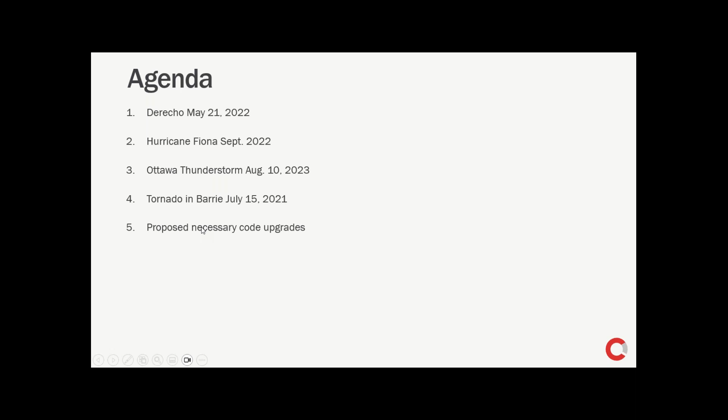So first, the derecho of May 21, 2022. The destruction from a derecho can be similar to that of a tornado, but it's typically in one direction along a fairly straight path. The derecho on May 21, 2022 affected the Quebec City-Windsor corridor. It was described by meteorologists as a historic derecho. It brought winds of about 190 km per hour, and the path extended for about 1,000 km.

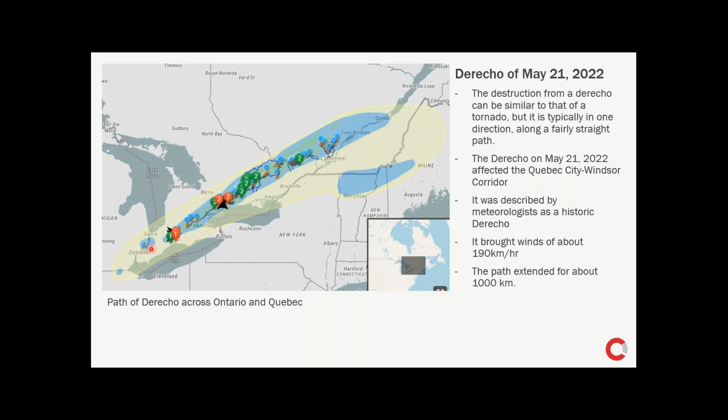So here you can see the map showing the path of the derecho of 2022. It extended from about London all the way to Quebec, and it had a very straight path. And here in this image, I'm showing the path in Ottawa. 3 cities across southern Ontario declared a state of emergency. Power outage affected 1.1 million customers. Hydro Ottawa described the damage to its power distribution system as more severe than the 1998 ice storm. The insured damage amounted to about $1 billion.

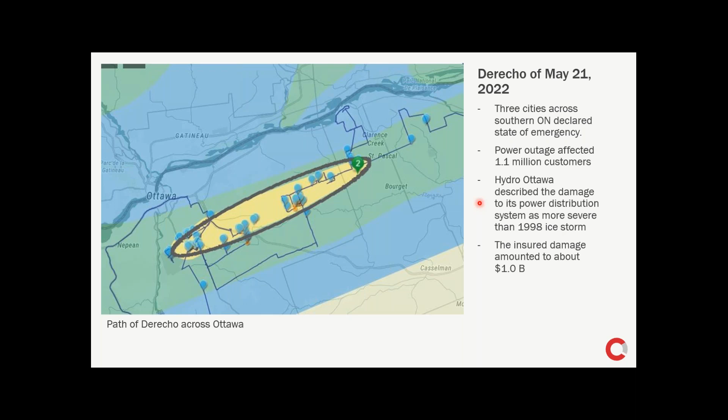So we had many files in Ottawa and also across Ontario. Of course, as you can imagine, a lot of them included tree impact to houses and cottages. So this one, for example, occurred in Parham, Ontario. Cause of loss, of course, tree impact, and it was extensive damage to the roof and porch structure. The safety concern was it had to be shored immediately, but of course, in this case, because it was empty, it could just be left empty with restricted access.

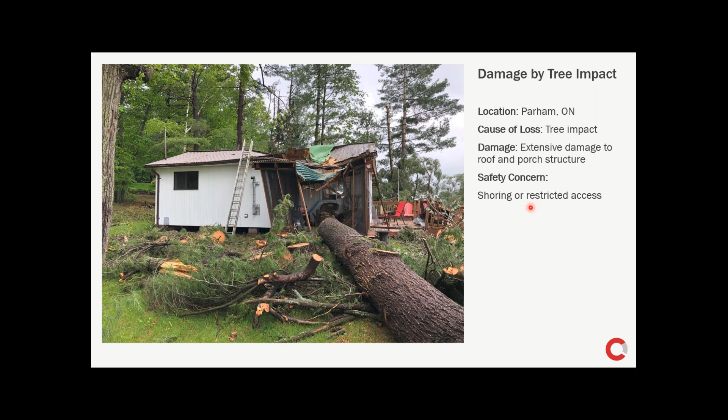Here I'm showing the damage to the roof structures. As you can see, the roof joists and roof sheathing are extensively damaged. Now, here I'm going to show you some rules of thumb about shoring of a structure when it's affected by tree impact.

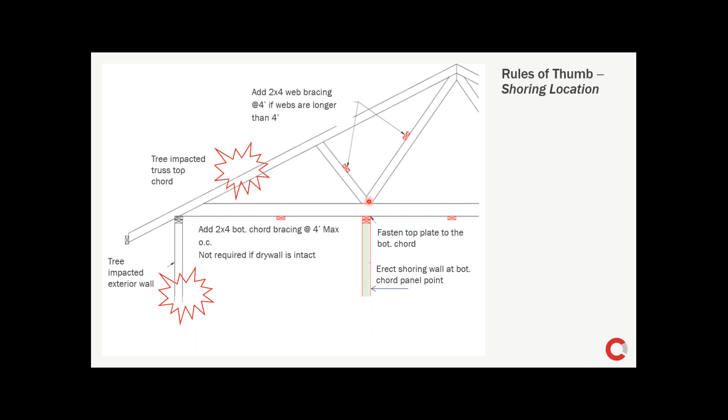So here I'm showing a section of a house or the roof of a house framed with trusses. Let's say the top chord of the truss is damaged by tree impact, and the wall is also damaged. So the contractor should install a shoring wall below the panel point. And the top plate of the shoring wall should be fastened to the bottom chord, and they should install 2x4 web bracing at 4 feet on the web members to stabilize the trusses.

Now, a lot of times, prolonged shoring is required, so the shoring needs to be there for a couple of months. Many roof structures sustain tree impact damage during fall, and in most cases, repair cannot be completed before winter. Usually, insureds want to continue to live in the dwelling, and adequate shoring is a must to ensure safe conditions under snow. Closing any physical holes is also important to prevent further damage.

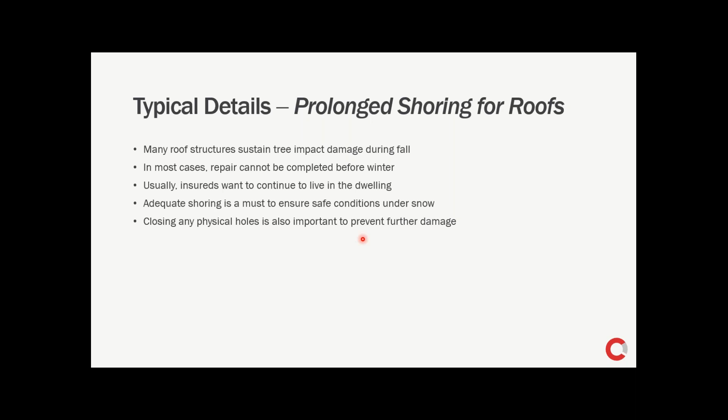Now I'm showing some typical examples of prolonged shoring, if the shoring is to stay there for a couple of months until the repairs can be started. This is showing the section of a roof framed with rafters, and let's say there is some limited damage to a roof rafter. It needs to stay there for many months, and there are also holes in the roof. So they should install a shoring wall under the roof rafter, and the shoring wall needs to extend all the way down to the basement and all the way up to the rafter. And the location of the shoring wall should be just below the small crack that is observed in the roof rafter.

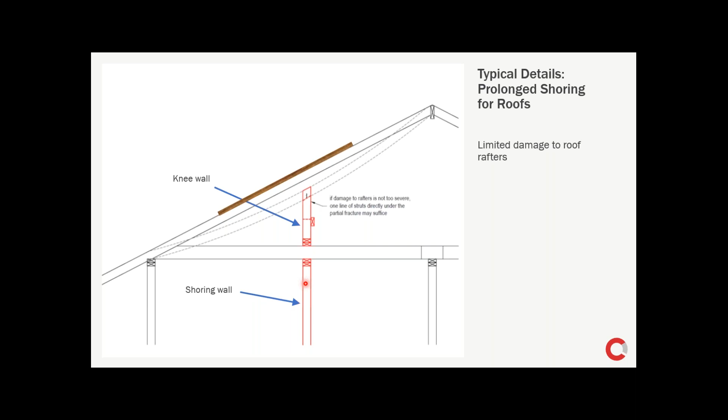And of course, over the roof, they need to install plywood and framing and install proper roofing membrane to stay there during winter. Now you can see that this shoring wall is making inconvenience for the residents here.

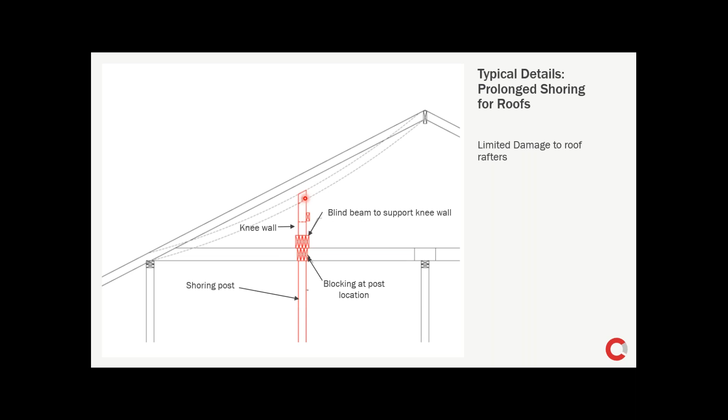So the other way is to install shoring posts and install a blind beam above the ceiling joists. And of course, there should be blocking between the shoring post and the blind beam. And above the blind beam, they can install their knee wall to support the rafter.

Now, if the damage is very extensive, like a rafter is maybe broken in the middle or something, they need to install shoring walls on both sides of the location of that crack. And of course, they need to be extended all the way to the rafter and down to the basement.

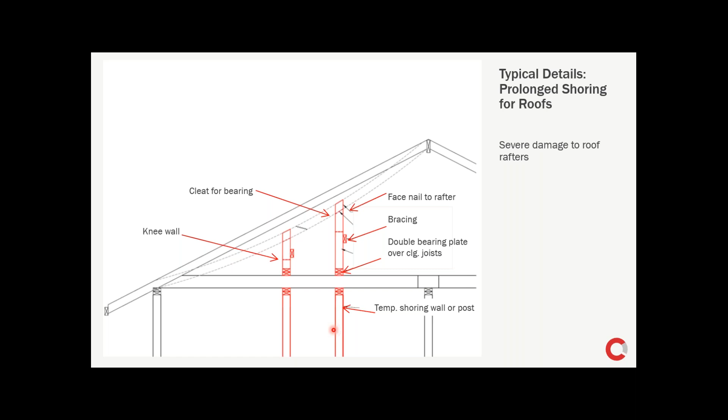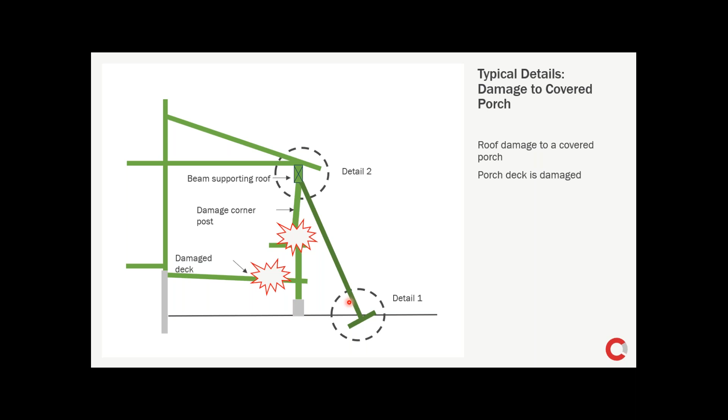Now, when it comes to tree impact, as you saw in this particular example, a lot of times the porch gets damaged. Now, here I'm showing an example of a porch, and I'm showing the section of the porch. Let's say the corner post is damaged and the deck is damaged, and they cannot install vertical shoring under the beam. So what they can do in this situation is install diagonal shoring at minimum 75 degrees.

At the top, they need to install cleats around the beam to properly support the beam, and also to prevent the shoring post from kicking in. At the bottom, they should prepare the ground for a proper firm support for the post, and also they should put bearing pads, and they should be secured to the ground by spikes, and behind the bearing pad they should put stakes into the ground.

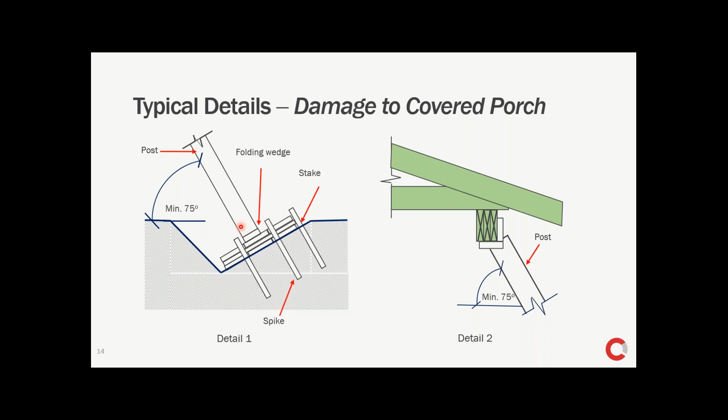At the bottom of the post, they need to install a folding wedge to ensure firm and full contact between the post and the bearing pad. For bearing, they can use outrigger pads or build their own pads using 12-inch by 12-inch or 16-inch by 16-inch pads. Now, this depends on the bearing capacity of the soil. For softer soil, they should use 16-inch by 16-inch. For stiffer soil, they can use 1 foot by 1 foot.

The pads can be constructed of 3 layers of exterior grade, 1/2-inch to 3/4-inch thick plywood sheets. The total thickness should be at least 1.5-inch, and they should be secured with number 8, 1.5-inch long structural screws spaced in a 4-inch by 4-inch pattern with a 2-inch edge distance.

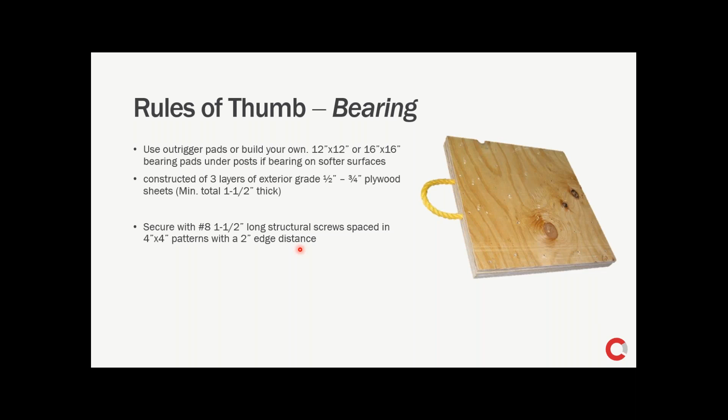Now, it is very common that when we go to site to inspect the damage, we see that the contractor has not installed any shoring to support the beam. So in this situation, I'm just telling you to be aware that when there is tree impact and there is damage to the corner post, because the restoration companies usually are the first people on site, they need to be aware of this and they need to install shoring: either a shoring post, diagonal shoring post, or needle beam. And we're going to talk about needle beam later on in this presentation.

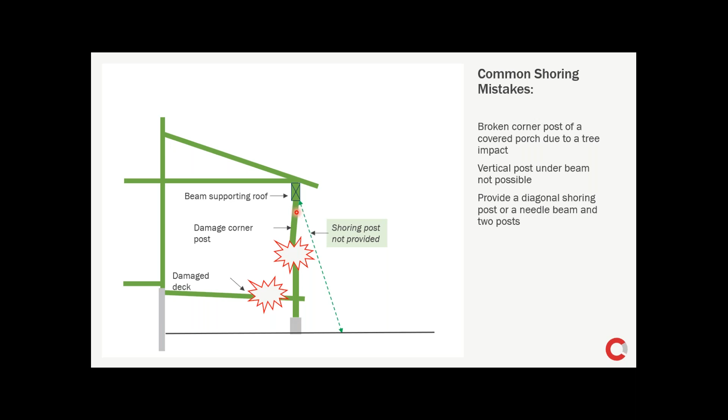Needle beam is they put beams under the beam and they put posts on both sides of the broken post. Again, there are situations where we've been to site and the contractor neglected to install shoring between the ceiling joist and the rafter. So there was a tree impact to the rafter or the truss, and the contractor installed a shoring wall under the ceiling joist, but it was not extended to the rafter. So technically it was no good.

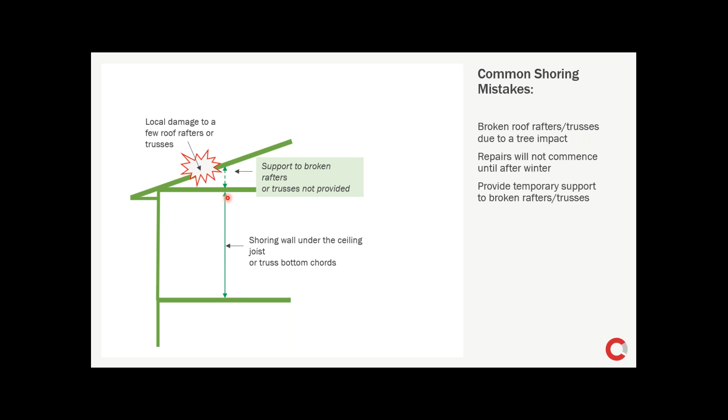When the engineer attends the site, of course, there's some obvious damage that can be seen from afar, but the engineer should always look into the attic or try to look into hidden spaces to see if there is any hidden damage. And if it's covered by some drywall or something, the contractor needs to partially remove the drywall around the obvious damage for the engineer to be able to see if there is any damage to the structural framing.

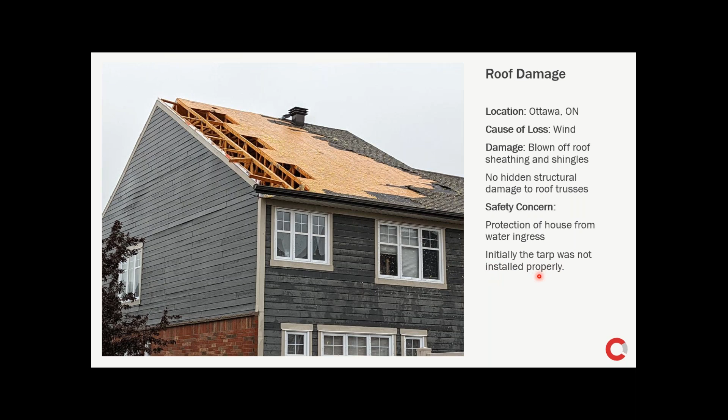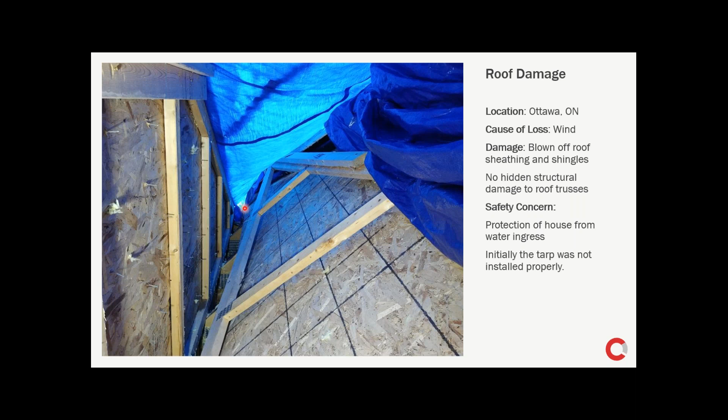Here's another view of the house. So this was a tarp that was installed initially by the contractor. Now, looking into the house, under the tarp, you can see that there are some holes here, and for days, water penetrated the house and caused further damage to the interior finishes. So this is to show how proper restoration effort from the get-go can prevent further damage down the road and reduce the insurance cost.

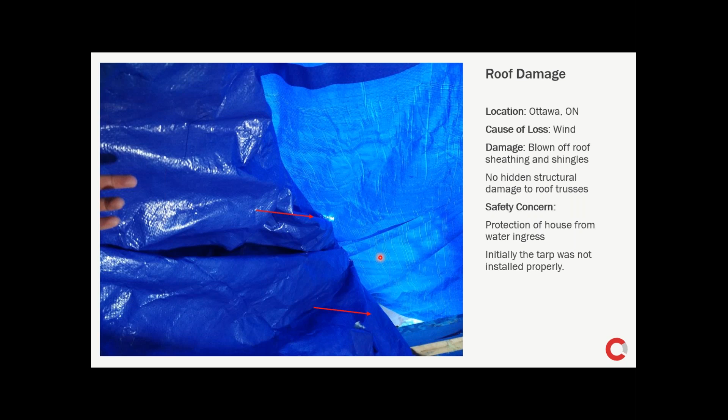Now, common shoring mistake. So let's say there's a few cracked or broken rafters and there's a hole in the roof, and repairs are not likely to happen before winter. Placing a sheathing board over the hole, or putting a tarp, is an insufficient closure. It is very common, especially during large-scale natural disasters, that not all houses can be repaired promptly, and they usually stay there over winter. So if they just put a sheathing there or just put a tarp over the hole, that's not enough.

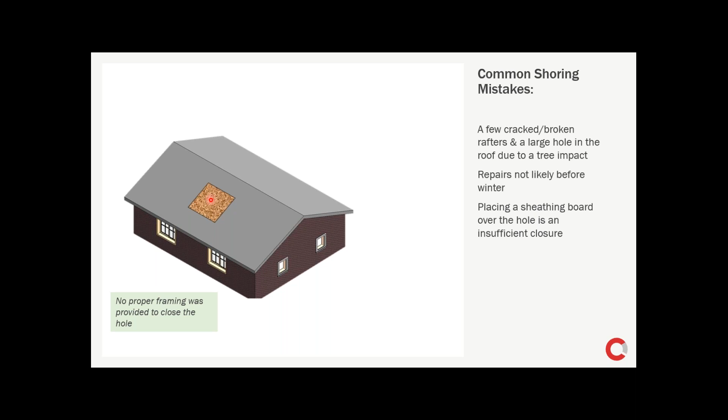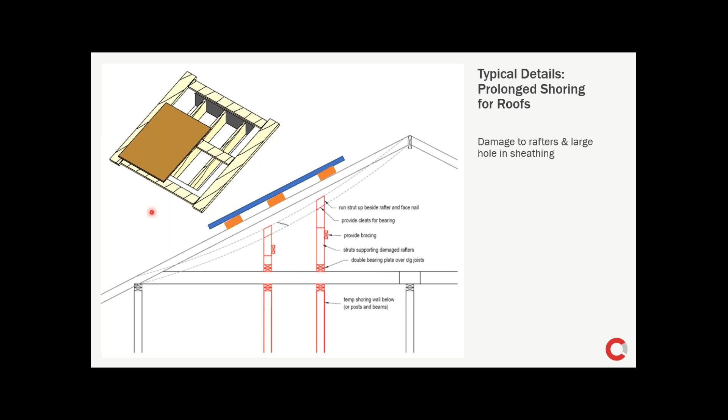What they should do, they should install proper framing over the existing rafters. And of course, the framing should be wide enough to sit on sound, sturdy rafters or top chords of trusses. And then they should install the sheathing over this framing. And of course, over that, they should install roofing membrane.

Now, here's the other example of roof damage during the derecho. It was in Ottawa. The damage was blown off roof sheathing of the house. And also the wind blew off the entire roof structure of the garage. It was metal plate connected trusses. I looked in the attic, there was no damage to the roof trusses.

As for safety concern, again, it was important to protect the house from water ingress. They did a good job for that. They immediately installed roof sheathing and tarp. But for the walls, they need to install bracing to support the freestanding walls of the garage, or demolish the freestanding walls of the garage immediately. And that's a big safety concern.

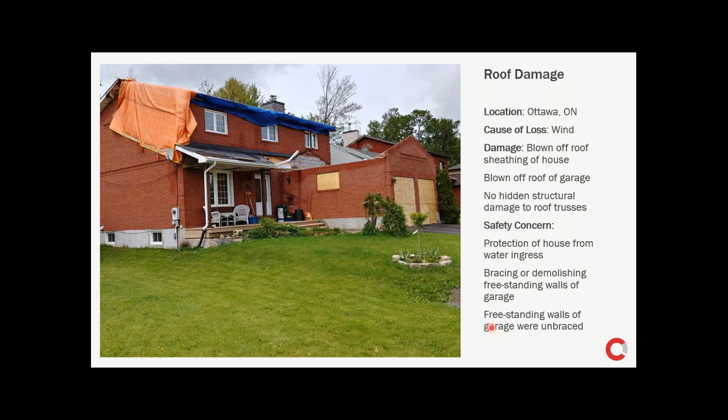The owners were still living in the house, and the walls of the garage were left like this for a couple of days, and that creates a safety concern. Yeah, so freestanding walls of garage were unbraced for a couple of days. Here's another view showing the gable wall and the walls of the garage. Now, this is specifically a safety concern if it's brick, because it's very unstable and it's heavy. With the roof on top of it, they have lateral support, but without the roof, they don't have the lateral support.

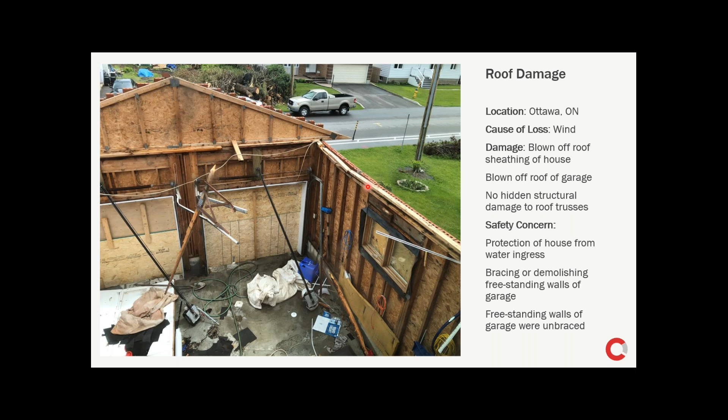Now, to brace the brick veneer, they can install the bracing on the outside. They need to place diagonal bracing, 2x6 or 2x8, depending on the design. And these braces also need their own lateral bracing. They need to install cleats at the bottom of the lateral bracing to prevent the bracing from kicking out. And of course, they need to be secured to the ground using 10M bars into the ground, embedded by 2 feet.

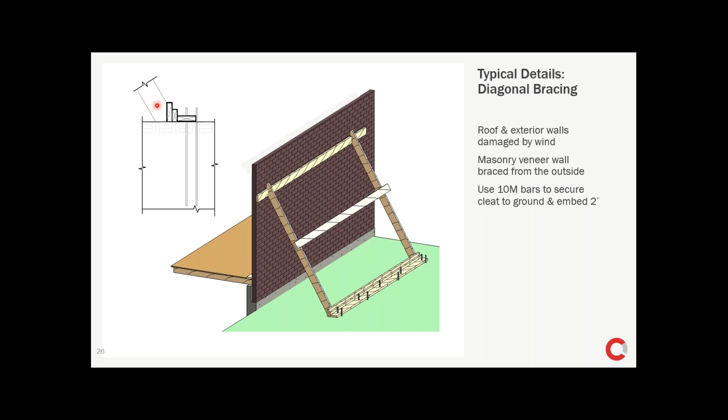And here is a detail of the support or the cleat at the bottom of the diagonal bracing. Here, they need to install a wedge to ensure full and firm contact with the cleat. And as I said, the cleat needs to be secured to the ground by 10M bars. And also there are some stakes or 10M bars that need to be installed behind the cleat. Again, it's all there to secure the diagonal brace from kicking away from the wall.

Oh, now I think you just lost sound. Oh, do you hear me now? Yeah. Oh, okay. Sorry. Yeah, just for a second. Pause it for a second. Okay.

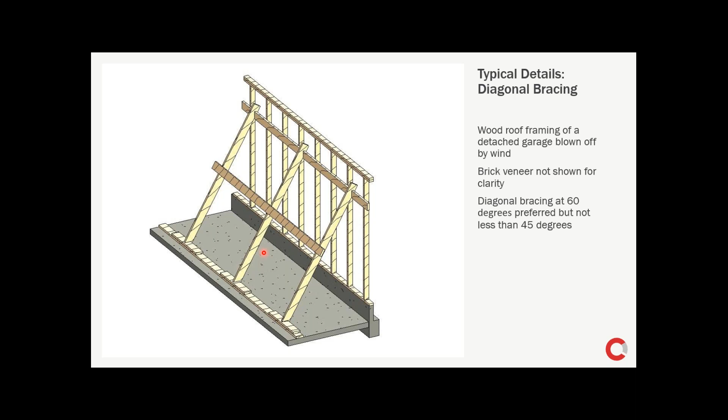Now, our file here was about a garage with the roof blown off. Let's say you have a house and the second floor roof is blown off and you need to diagonally brace the wall of the second floor. Kind of the same situation, except that here you really don't want to brace from outside, because then the diagonal brace needs to go from the second floor all the way down to the ground. So you brace it from inside, very similar to what you had in the previous slide.

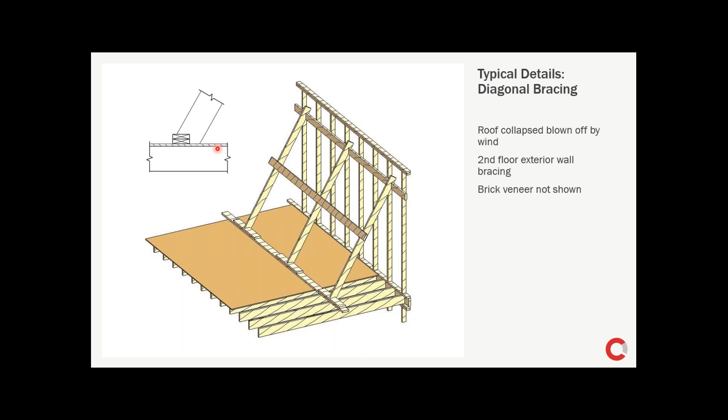Now, again, it's a common mistake I've seen a lot of times: the roof has been damaged either by wind or fire or tree impact, and the walls are freestanding and the contractor has not installed any diagonal bracing. I understand that sometimes they're just waiting for investigations to proceed, but they should immediately install some diagonal bracing to support the walls. And if they don't want to do that, at least install a tape around that area to restrict access to and around that structure. They need to be aware that these walls are unstable.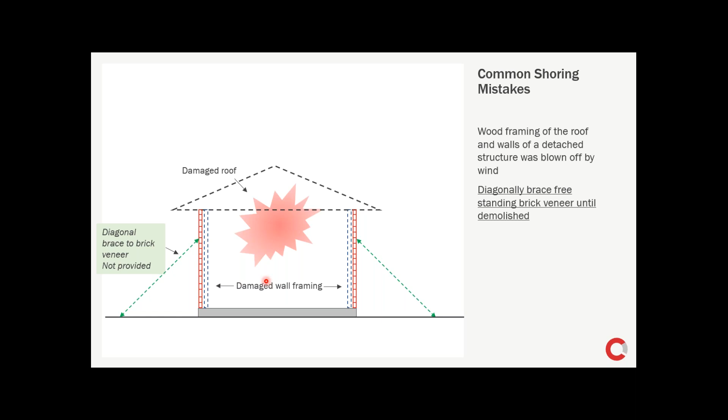The other natural disaster that I want to talk about is Hurricane Fiona of September 2022. It was the 10th most expensive natural disaster in Canada measured by insurance payouts, causing $660 million in insured damage. Of that, $385 million was in Nova Scotia, $220 million in PEI. It was the most costly extreme weather event ever recorded in Atlantic Canada. And many of the people affected were located in high-risk flood zones where residential flood insurance is not available.

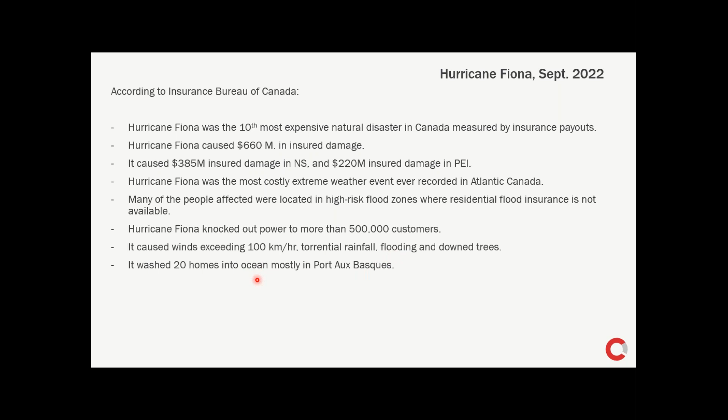Hurricane Fiona knocked out power to more than 500,000 customers. It created winds exceeding 100 km/h, torrential rainfall, flooding, and downed trees, and it washed 20 homes into the ocean, most in Port aux Basques. And this is one of the examples of soil erosion under a house. This is one of the most severe cases that I had for this event. It was in Cape Breton. Cause of loss was waves.

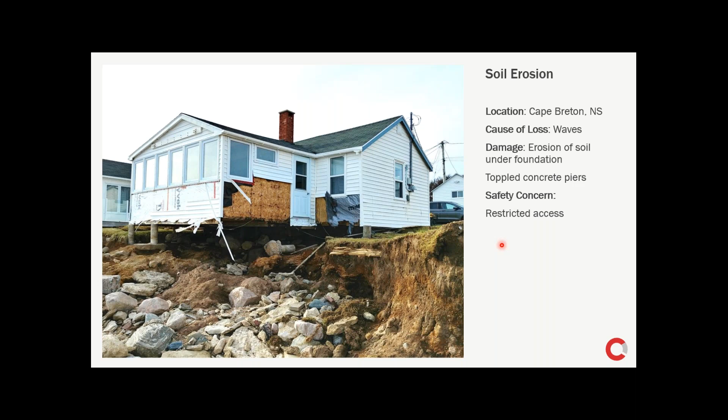We were asked by the insurance company, was it wave or was it wind? The wind cannot cause this much erosion alone. Plus, if the wind was the cause of erosion, we would have seen at least some shingles blown off. So the damage was erosion of soil, and it toppled some concrete piers. As for safety concerns, access must be restricted in these situations. You can see another view of the soil erosion under the house and the toppled piers.

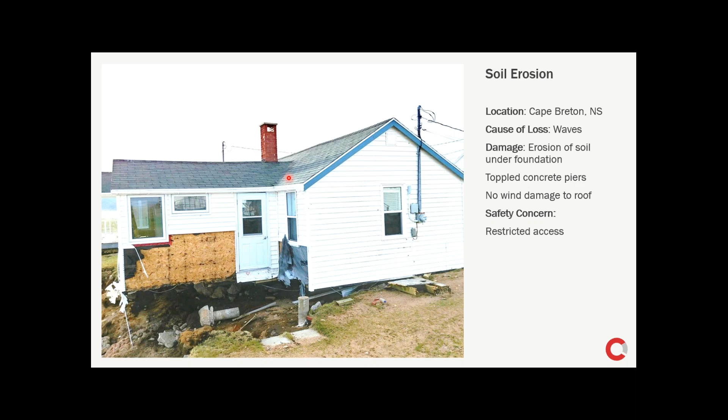Now, as I said, there were no blown off shingles, so the soil erosion was by waves, and I cannot even say wind was any factor in this soil erosion.

The other example for Hurricane Fiona was roof damage and soil erosion. It was in Louisbourg, Nova Scotia. The cause of loss was wind and flood at the same time. Wind was responsible for the damage to the roof, as you can see, and there was some soil erosion in the crawl space, and I'll show it to you.

The damage included blown off roof decking and shingles and soil erosion. As for safety concern, protection of house from water ingress was important, and the access should have been restricted due to excessive water damage to interior finishes and also soil erosion.

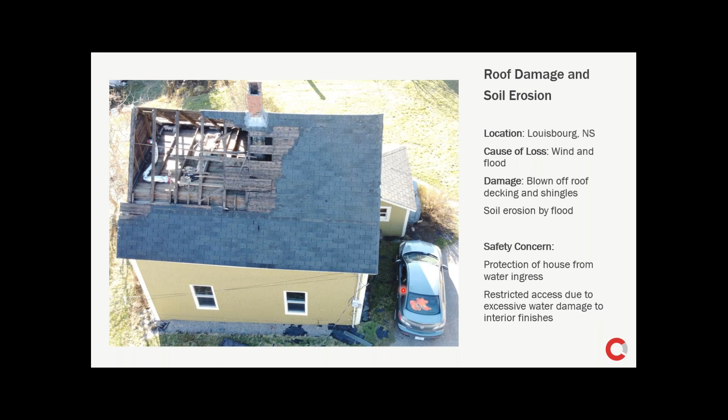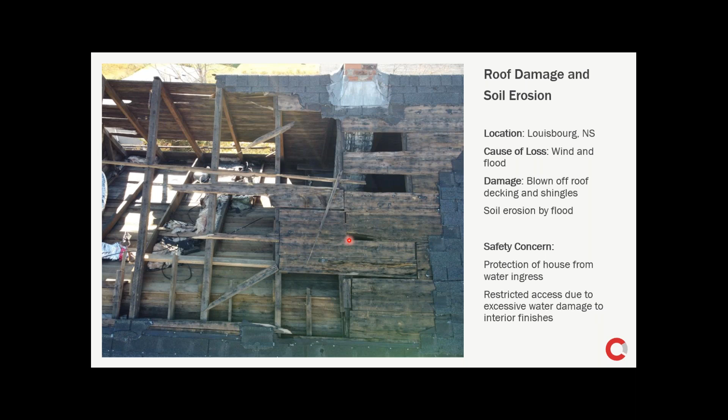I'm showing a closer view of the blown off decking and the roof structure per se. Now you can see that there was also a lot of water damage from before on the roof structure. This was a very old house. I'm showing the crawl space. You can see extensive soil erosion. You can see this pier and soil around it is washed out. And here you can see this toppled pier under the floor joists.

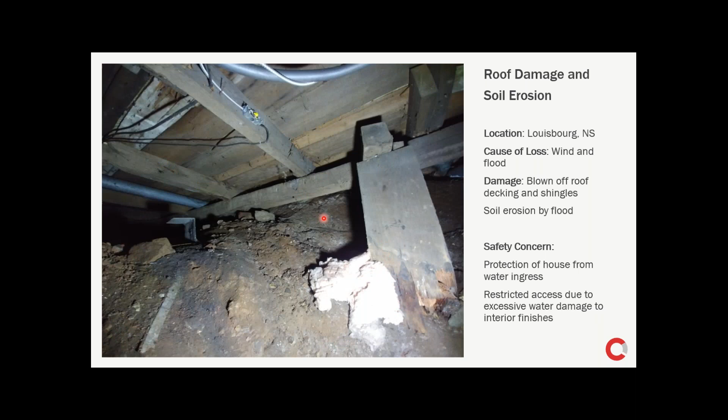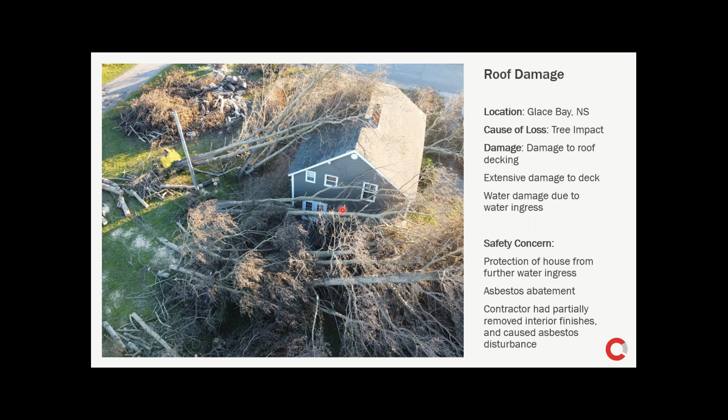In these situations, when you know that the house is old, you need to be aware of how you want to remove the finishes. There are guidelines to safely remove finishes. If you want to do it safely, they need to follow those guidelines. But here, unfortunately, they missed it. So they had partially removed the interior finishes, and then they tested for asbestos, and it came positive, and they had already disturbed the asbestos. And the occupants were coming in and out to get their stuff, which is a safety hazard. Unfortunately, it happened in this case.

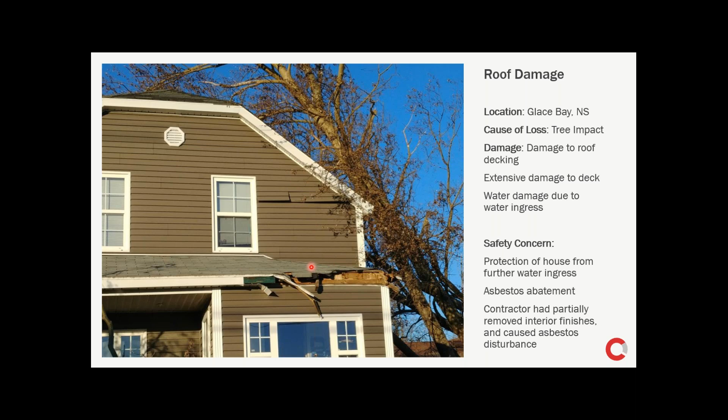Here's another view of the tree impact to this house. As you can see, some decking damage to the lower roof as well.

Now, this is another example. This is in Montague, PEI. The damage was cracked foundation walls. I'm showing this because this damage was not caused by Hurricane Fiona, although it was blamed on Hurricane Fiona when the claim first came in. But the damage was really due to foundation settlement and lateral pressure of soil.

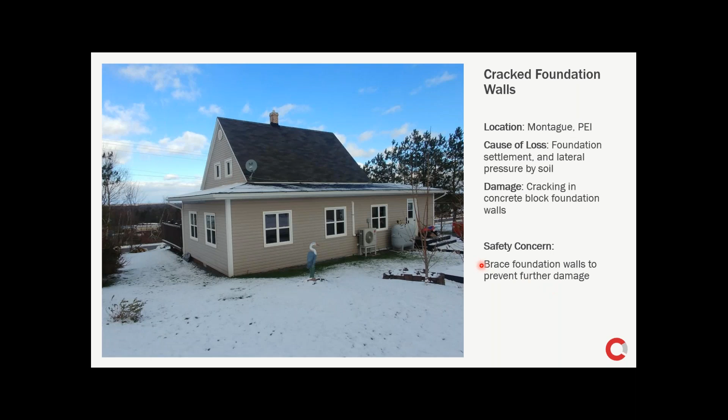And the damage included extensive cracking in concrete block foundation walls. And as for safety concern, they had to install diagonal bracing against the foundation walls to prevent further damage. And we provided instructions and drawings for that. And this is a view of the cracking in the foundation walls.

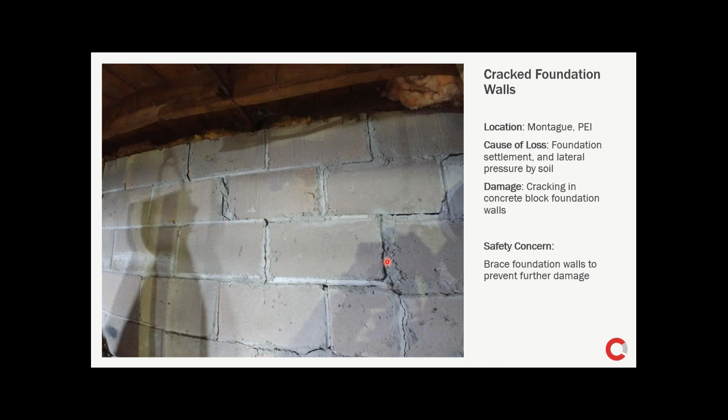Now here, I'm gonna point out the color differences between different areas of the mortar. So you can tell that these are pre-existing damage, and there were some pre-existing cracks that were filled up by mortar. So these are pre-existing condition and not related to Hurricane Fiona.

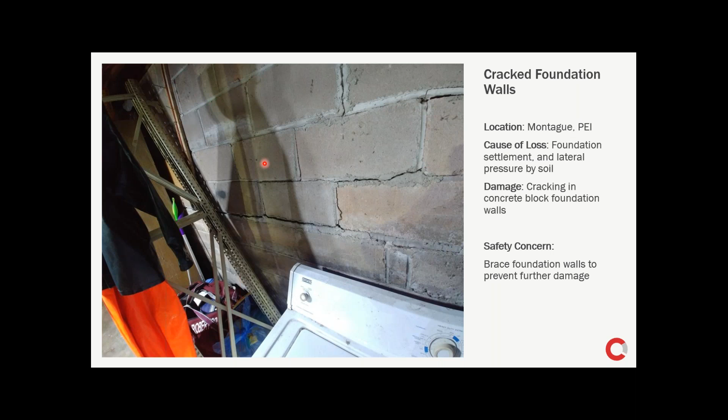Another example of damage during Hurricane Fiona, it was a shifted shed. It was in Wellington, PEI. Cause of loss was flood and wind. The damage included a shed that was shifted by 2 feet, and the rear deck was damaged by flood and wind, and the handrails were damaged by wind, and they were removed.

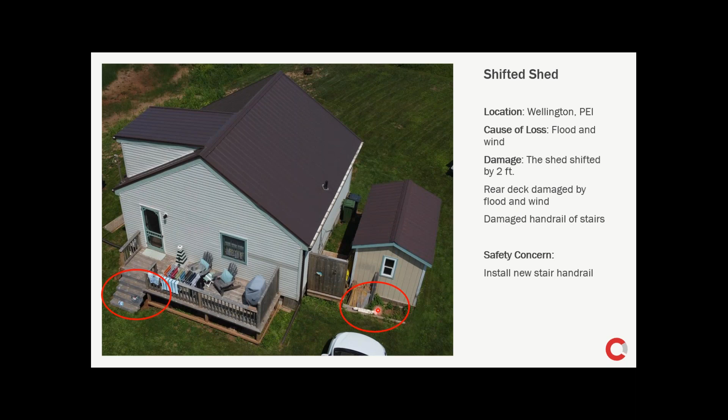And as for safety concern, no serious safety concern except that the handrails needed to be installed immediately. And of course, the shed needs to be pushed back in place. Of course, it's not a safety concern. A view of the shed that was shifted by 2 feet.

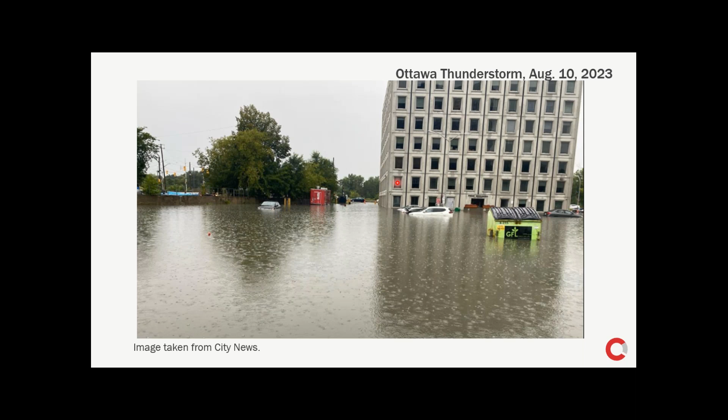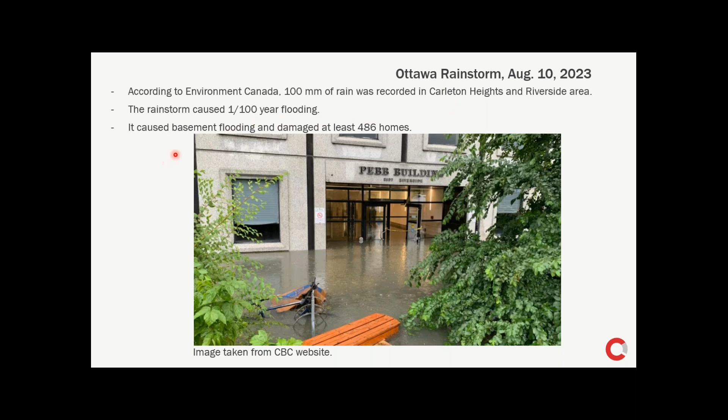The other natural disaster was Ottawa thunderstorm on August 10, 2023. According to Environment Canada, 100 millimeter of rain was recorded in Carleton Heights and the Riverside area. The rainstorm caused 1 in 100-year flooding. It caused basement flooding and damaged at least 486 homes. This is one of the examples that we had.

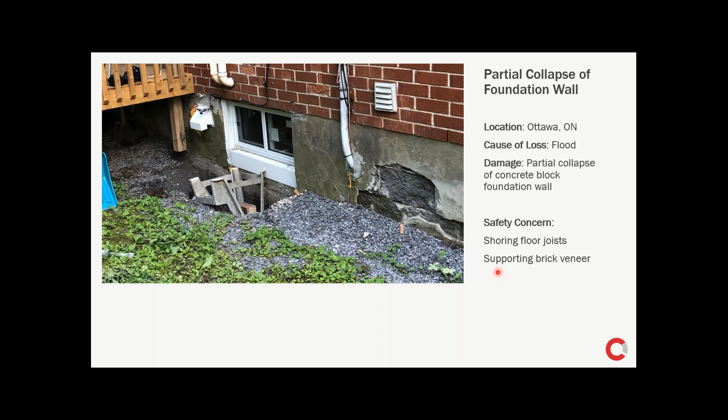It was partial collapse of a foundation wall in Ottawa, Ontario, and it caused a concrete block foundation wall of the house to partially collapse in. As for safety concern, the floor joist needed to be shored up, and the brick veneer needed to be supported.

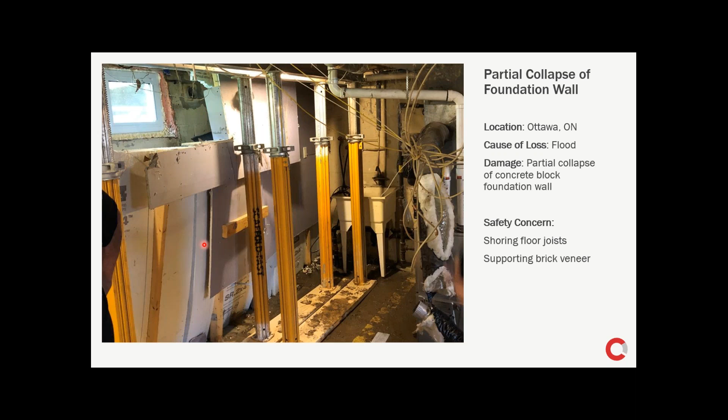I'm showing the shoring of the floor joist. So this is the wall that was damaged or partially collapsed, and the floor joists were sitting on this wall. A closer view of the concrete block foundation walls. You can see the bottom of the wall was collapsed inward.

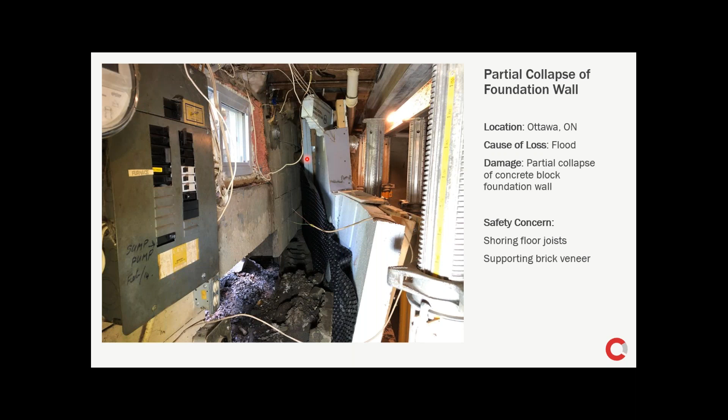And yeah, this is a closer view. You can see the bottom is collapsed. You can see the top part of the wall is in place. So they had to install the shoring that you saw in the previous slide.

Now here you can see needle beams to support the angle, and the angle is to support the brick veneer. The reason is that the brick veneer is sitting on the concrete block wall, and of course it was partially collapsed, so they needed to install needle beams.

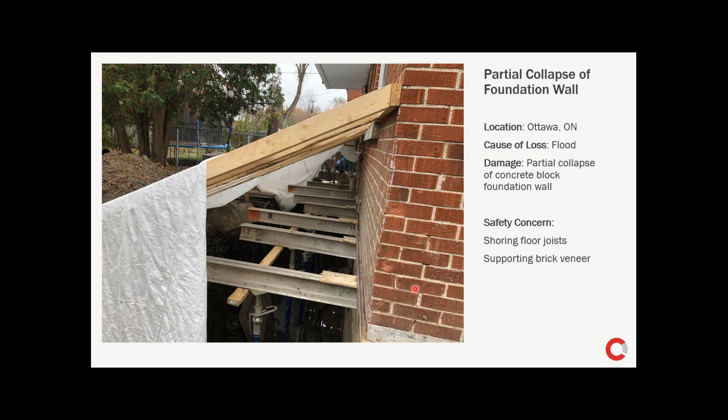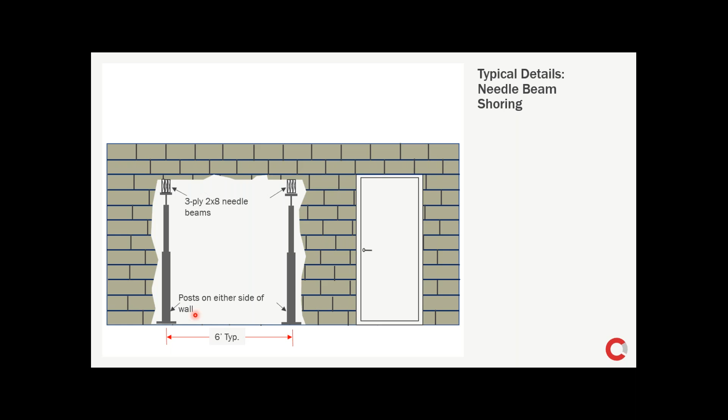So in situations where there is damage to the foundation wall or partial collapse of the foundation wall, they should use needle beams that extend from inside to outside of the foundation wall, usually 3-ply 2x8 needle beams, or they can be aluminum needle beams, I-shaped. As you saw in the previous slides, the posts should be 6 feet apart maximum.

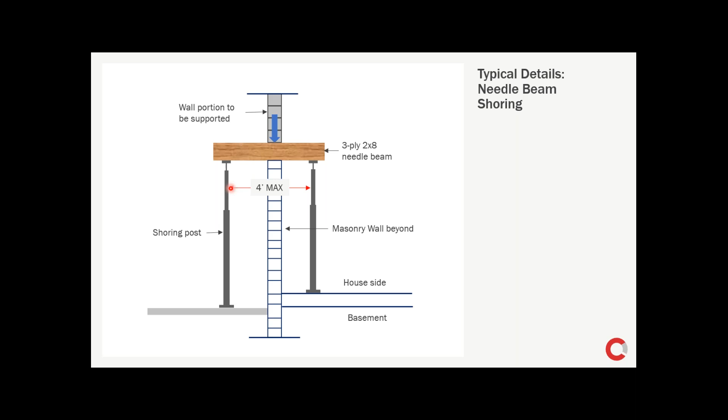Here you can see a section of the needle beam, and here you can see the wall below the needle beam, which is collapsed, and the part of the wall above the needle beam. And here you can see a set of shoring posts inside the house and a set of shoring posts outside the house, and they should be 4 feet apart maximum.

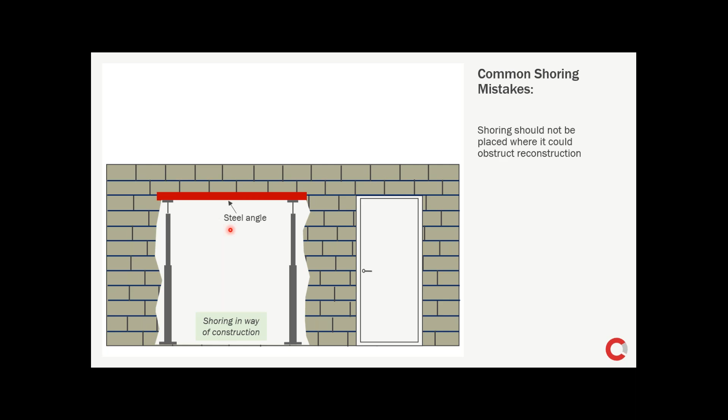What contractors usually do is sometimes they install shoring posts inside the wall, which is not really, it's in the way of working.

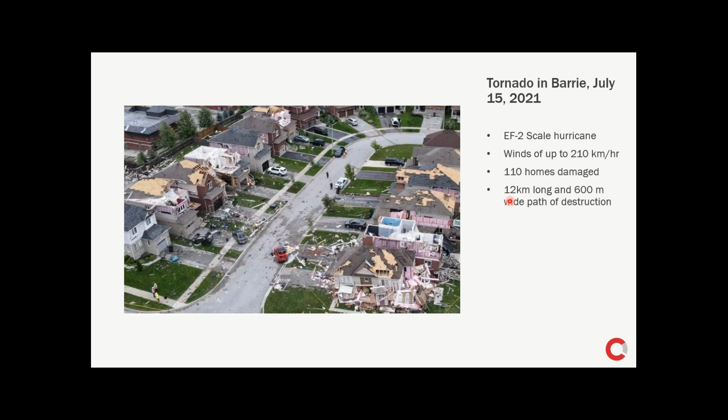Another example that I'm going to talk about is the tornado in Barrie. It was an EF2 scale tornado, and it produced winds of about 210 km per hour. 110 homes were damaged, and the track of destruction was 12 km long and a 600 meter wide path of destruction.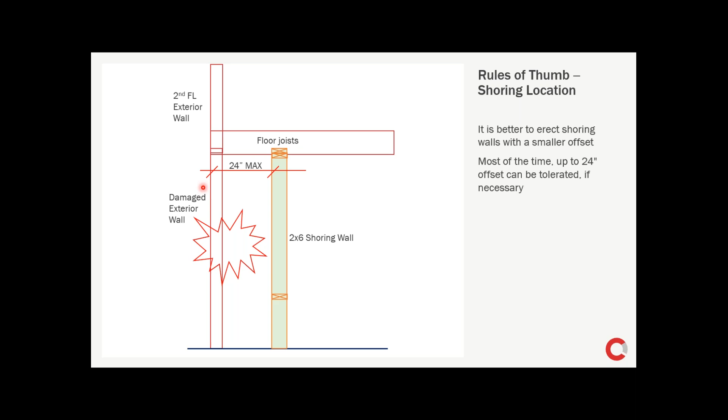Now, I'm giving some typical shoring instructions to support the floor joists if there is any damage to the wall. So if there is damage to the exterior wall, they need to install a shoring wall at maximum 24 inch from the exterior wall. Here I'm showing the section of a house. This is the roof truss. So they need to install a shoring wall under the bottom chord of the truss.

Again, at maximum 16 inch if the bottom chord is 2x4, and at maximum 24 inch if the bottom chord is 2x6. And we are assuming that the exterior wall is damaged by, let's say, wind or tornado.

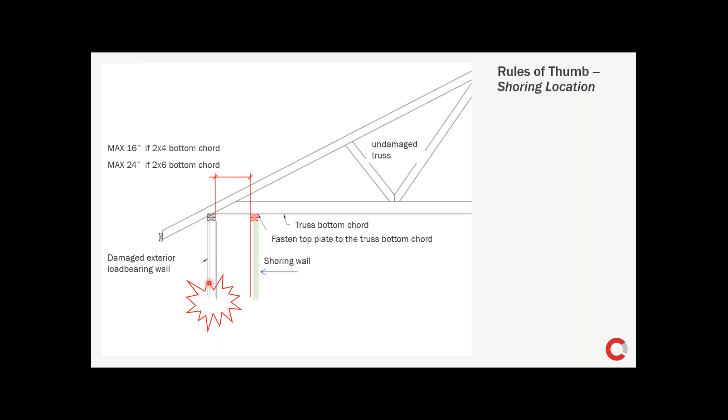Now, the need for code upgrades. According to Insurance Bureau of Canada, the average number of insurance claims due to extreme natural disasters has quadrupled since 2008. Average annual insurance coverage in 2023 was about $2 billion versus $632 million from 2001 to 2010.

The 10 most expensive natural disasters based on insurance claims are, you can see here, Fort Mac wildfires, Eastern ice storm, Southern AB flood, Alberta hailstorm, Toronto flood. In 2022, Hurricane Fiona, Toronto flood, Ontario windstorm, and BC flood. Now, these are at different dates, from 1998 to 2022. And as you can see, 4 of the 10 most severe natural disasters occurred since 2020.

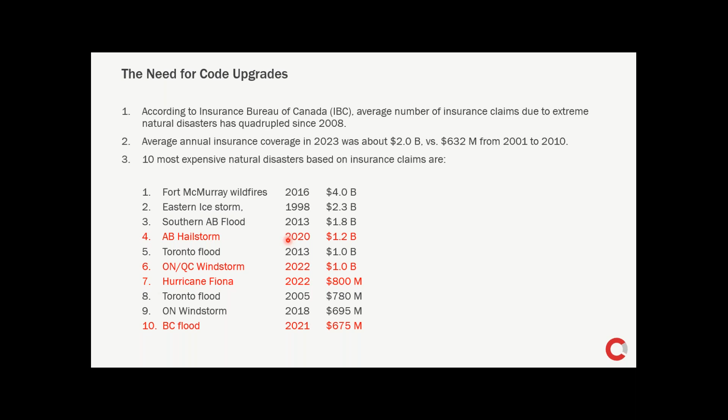So this is alarming. So we propose that Canada needs a national flood resistant design standard similar to the ASCE standard. Future codes should make tornado an extreme load case that needs to be considered by the designer to ensure life safety. Codes should adopt emerging best practices to address property and life safety issues with urban wildland interface fires.

And the building codes should also increase design wind loads, make it mandatory to use hurricane ties to fasten roof framing to walls, maybe set minimum distance requirements between houses and large trees, and maybe set requirements to stabilize trees at close proximity to houses if they are large and if they are at risk of falling in a wind.

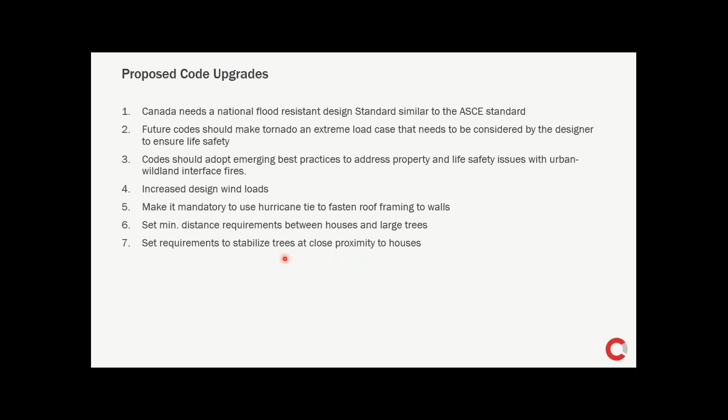So in summary, typical damage to structures in windstorms includes shingles, sheathing and roof being blown off, tree impact, shifting of structure. In flood, you have soil erosion, damage to foundation wall. The role of the engineer is to give safety and shoring instructions, look for hidden damage and provide repair drawings. And we proposed some code upgrades that we think are necessary to mitigate future losses by extreme weather events.